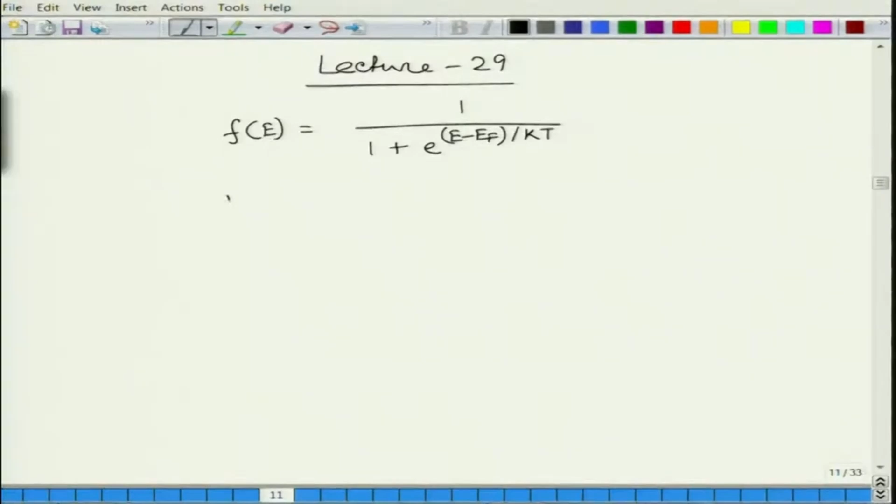We have looked at the Fermi function for a particular energy level, which has this form. It is a function of temperature, and the Fermi level is defined as that energy for which the Fermi function is half, or the probability of finding an electron in that energy level is 50%.

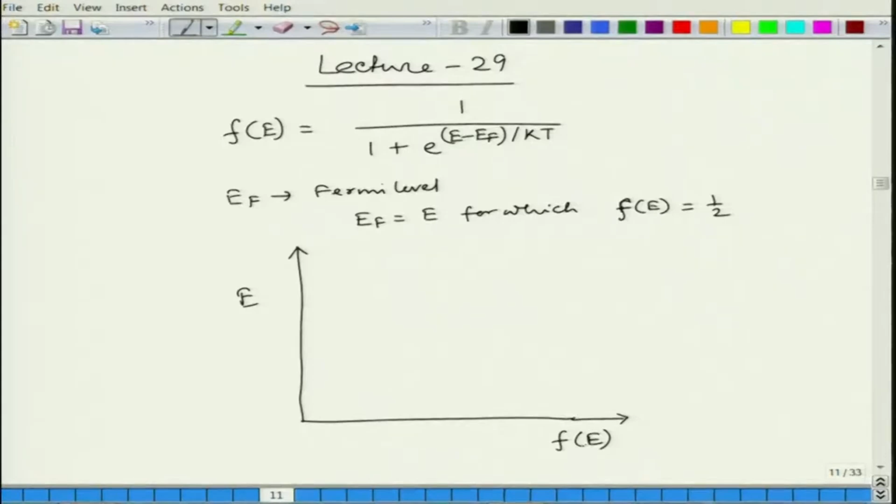Now let us look at the effect of this in terms of the band structure. Suppose we have this energy axis, and if we plot the Fermi function, how will it change? The Fermi function is a probability, so it can vary between 0 and 1, these being the two hard limits.

Now at a particular energy, let us say this is the band structure for a particular material, the Fermi level will be here, at 50% occupancy probability, just in between the conduction band and valence band. If we draw the corresponding line, at 0 Kelvin the probability will change between 0 and 1 abruptly. In between you will have equal probability, and when the Fermi function is half, this is the Fermi level. This particular curve is for 0 Kelvin, when there is no excitation available.

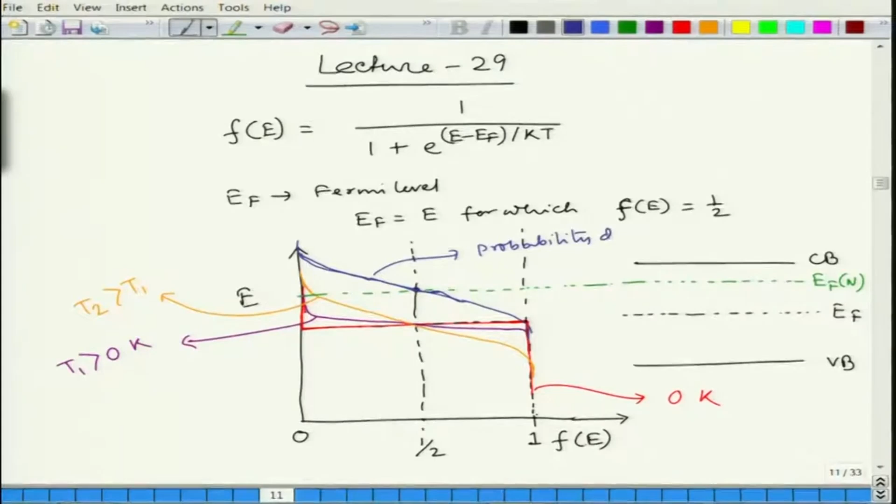Now, for an n-type semiconductor, the Fermi level itself is shifted towards the conduction band. EFn is the modified Fermi level for the n-type semiconductor. If we extend that line, for this n-type material the crossover will happen at this point, because that is the Fermi level and it has to be F equal to half. At that particular temperature, the Fermi level of that material will be parallelly shifted and move upward. This is the probability distribution, the Fermi function, at temperature T2 for the n-type semiconductor.

So we see that the Fermi level is shifted upwards in the energy scale. On the other hand, for a p-type semiconductor, the Fermi level will shift downwards towards the valence band, because now the hole concentration will be higher. The same thing will be parallelly shifted, but I should use another color to be consistent. So this one is the Fermi function for the n-type semiconductor, and the lower one is the Fermi function for the p-type semiconductor.

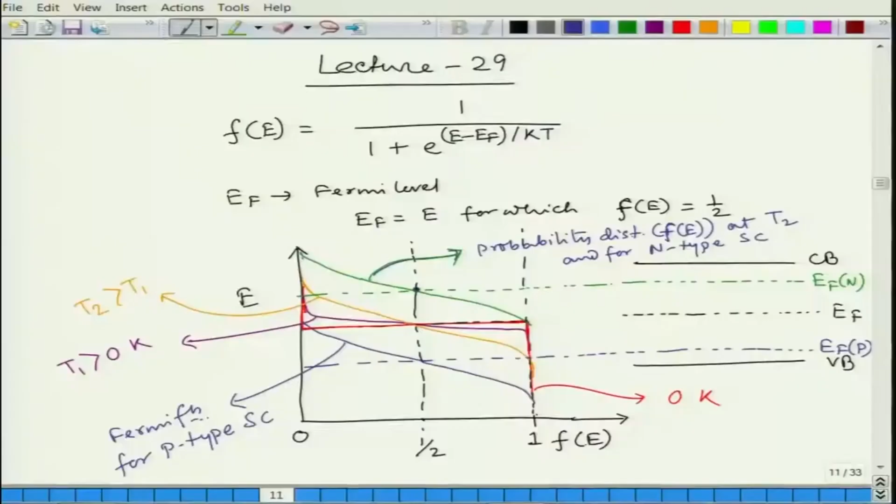So few observations we can write. One is that for intrinsic semiconductor, that means no doping case, in that case EF is always at the middle of the conduction band and valence band, or in the middle of the band gap.

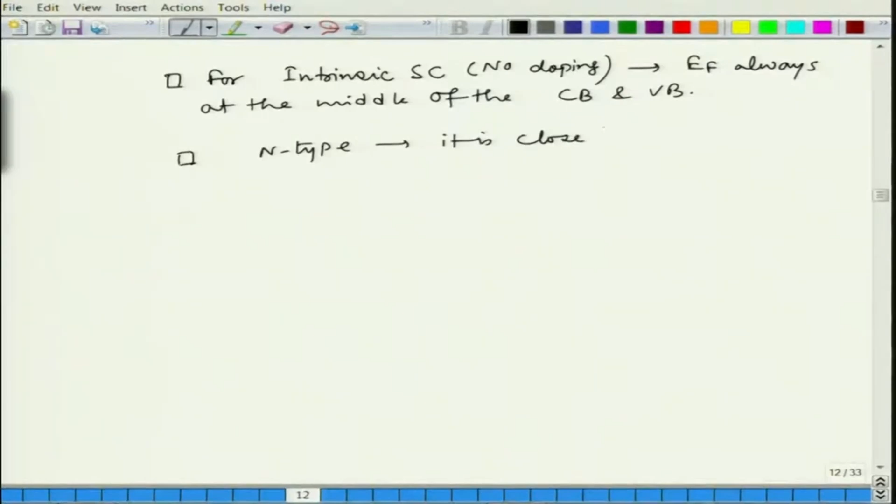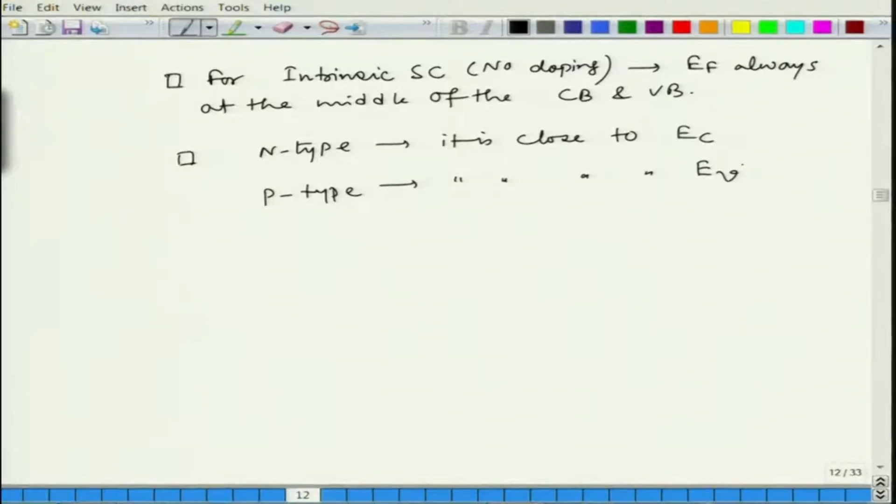Now for n type it is close to conduction band, and for p type it is close to valence band. And we have talked about this 'close to', right, but how close?

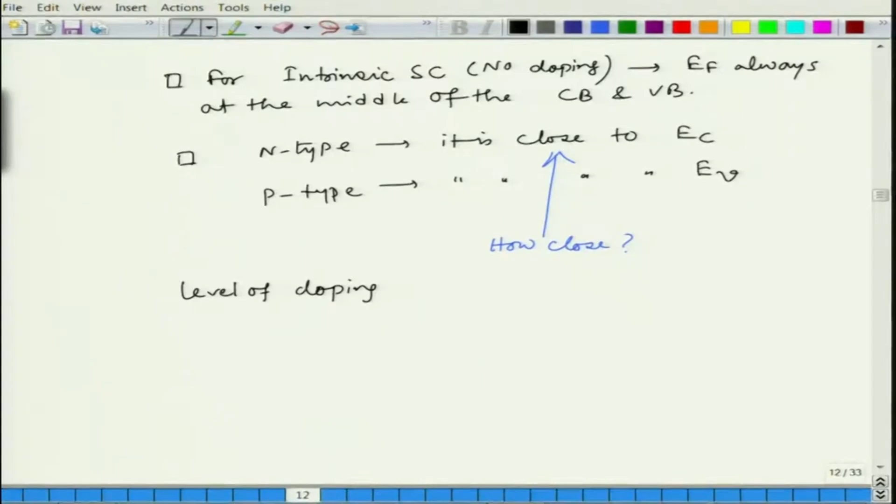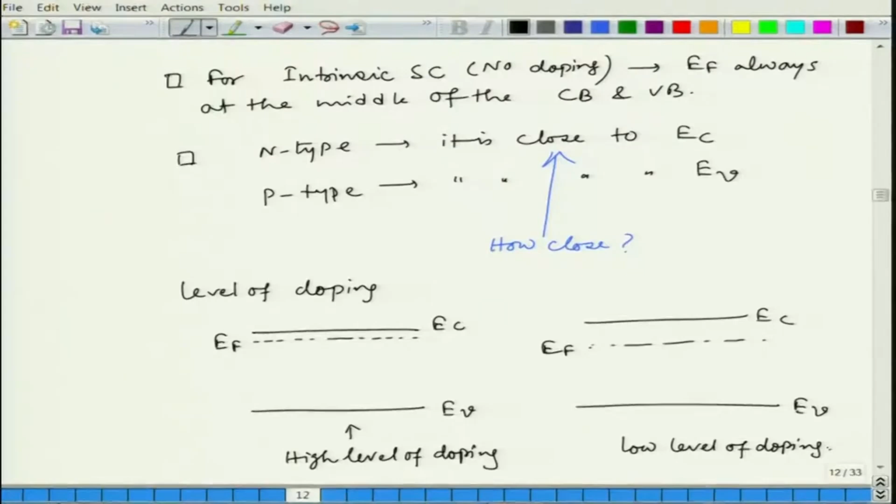That will depend on the level of doping. So you can say that if this is conduction band and this is valence band, and EF the Fermi level is really close to the conduction band, that means it is high level of doping. And for low level of doping you will have it closer to the conduction band, but not that close. That will give you the qualitative understanding of how the Fermi function is affected by doping as well as temperature.

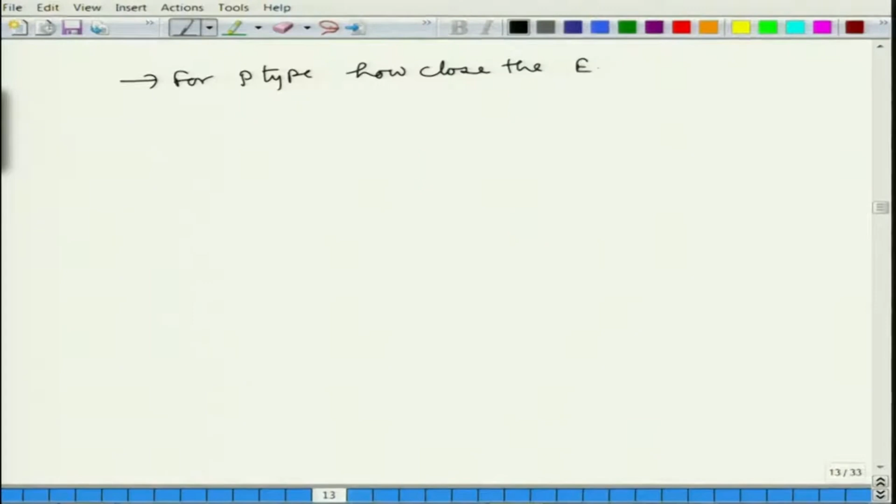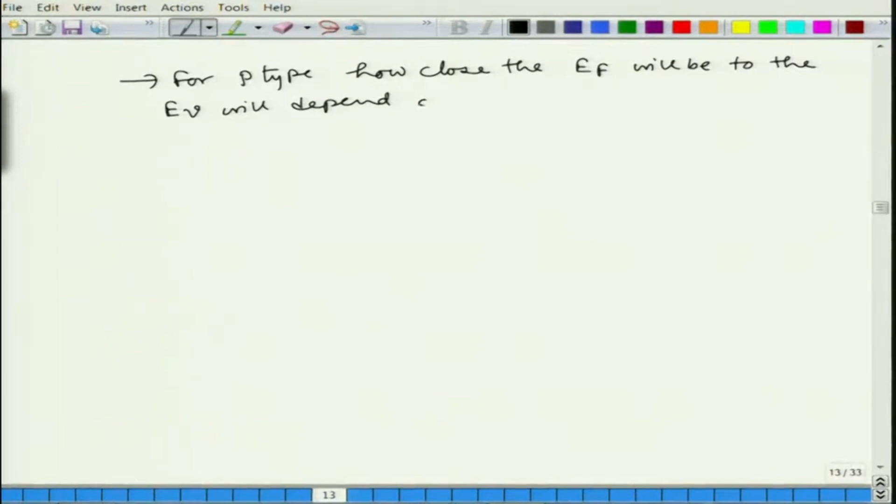So similarly for p type, how close the Fermi level will be to the valence band will depend on doping. Higher the doping, closer the Fermi level. And by doping, I mean introducing impurity element in the bulk lattice of the pure intrinsic semiconductor.

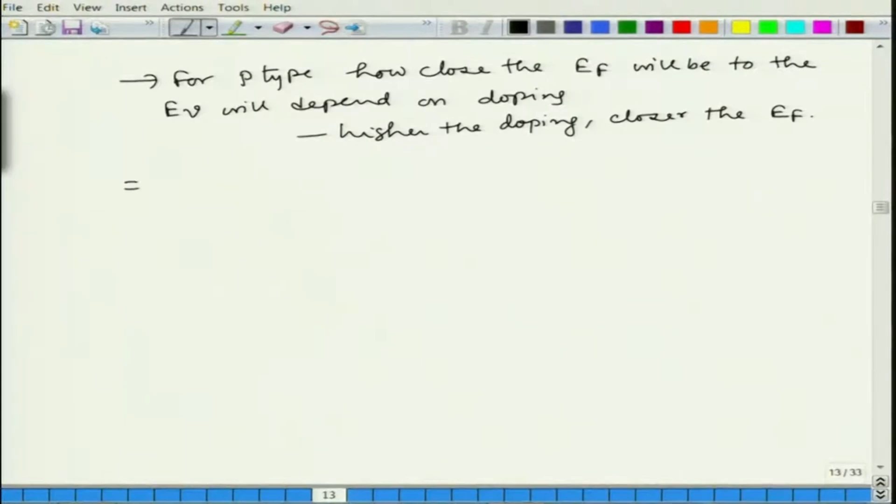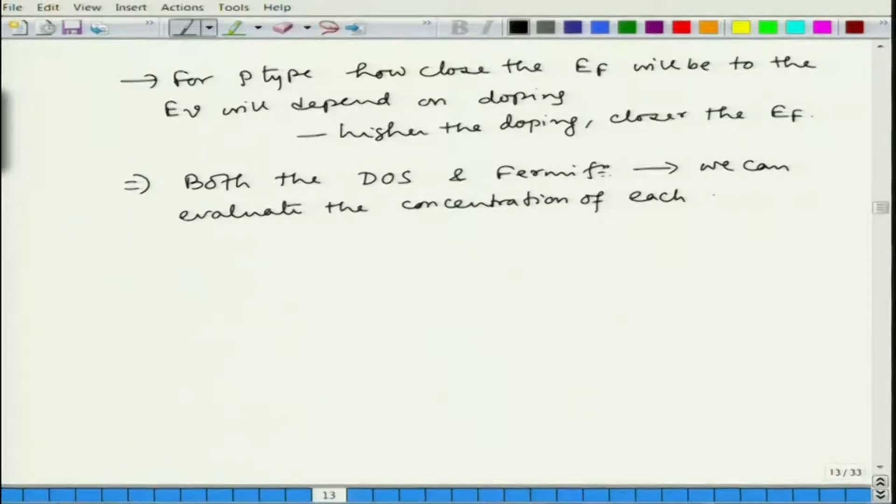Now when we have both the density of state and Fermi function, we can evaluate the concentration of each charge carrier. Electron and hole we can evaluate them, but before we evaluate, let us look at it qualitatively first, and then you can always use quantitative formula to evaluate it exactly. So for electron you can find it by multiplying the probability of finding an electron, which is given by the Fermi function, and the number of available states, and you can integrate it to get the complete number.

Let me first write it and then I will explain. So first thing is that this is concentration of electrons, or rather free electrons, because it is not just electrons, but electrons in the conduction band which are able to carry electricity or charge. And this naught stands for the equilibrium case. N naught means the equilibrium electron density or electron concentration. Equilibrium means no applied voltage or no light or any energy input.

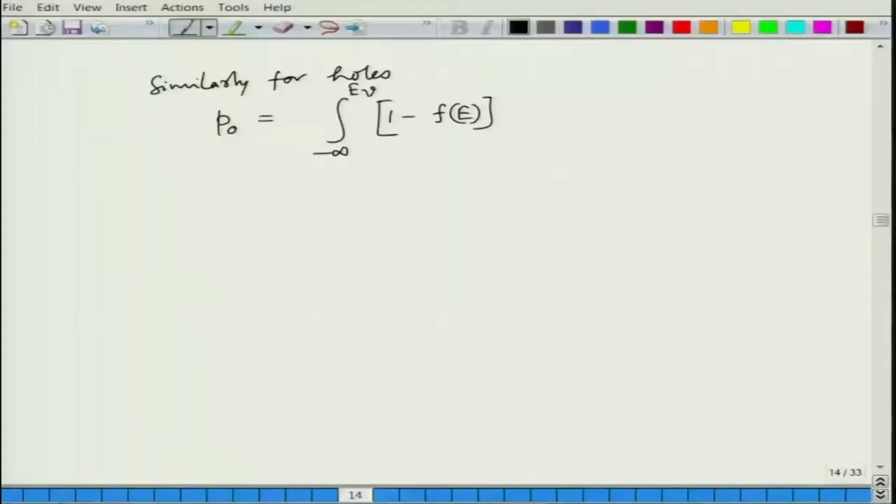Now for the probability of finding a hole, it will be 1 minus the probability of finding an electron. Either it will be a hole or an electron. So probability of finding a hole will be 1 minus the Fermi function. That is the tricky difference you have to note. It is not the Fermi function itself, but 1 minus that, multiplied into the density of state in the valence band.

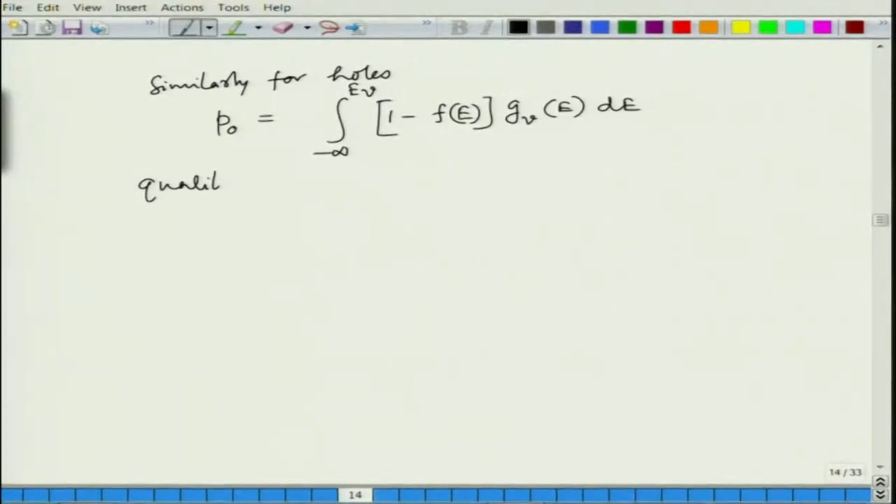By similar logic you will be able to find it. Now, qualitatively, if you look at how these integrations will give you the quantity, qualitatively what you can draw: if you have the conduction band, valence band, and this is intrinsic semiconductor.

So, that means the Fermi level will be, let me continue this. So, this will be the Fermi level, and let me continue this one as well.

Now, here we can plot three things. One is the density of state, which we have seen will be somewhat like this. In the band gap there will be no density of state, zero, and as you go up in the conduction band, density of state will increase, and as you go down in the valence band, the density of state will increase, following a square root law. So this is the density of state.

Now, the other important thing here is the Fermi function. We have seen that for a particular temperature, if this is 1, it will be somewhat like this. So this is the Fermi function.

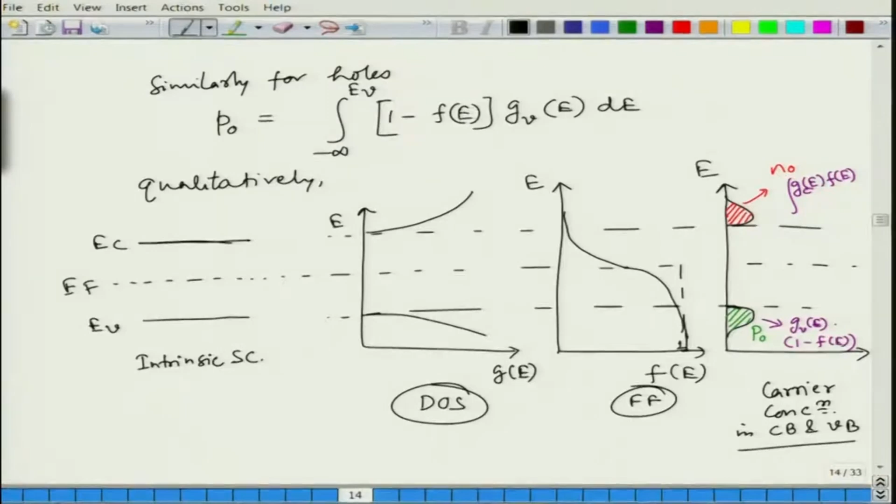And for an intrinsic semiconductor, you can see both of them will be same. So this is the carrier concentration in the conduction band and in the valence band. Now, how these things will change if you dope becomes very interesting.

Now let us look at doped semiconductor. First, we will look at N type. N type means there are more electrons than holes. N type also means that the Fermi level has shifted towards the conduction band.

So let us do the same exercise here. If we have EC, EV, and now we have the Fermi level which is closer to the conduction band edge. Let me extend these lines, then do the same exercise here.

Here we will have the density of state, and it will be the same. Density of state is unaffected by the shifting of the Fermi level. Only the Fermi function is getting affected, not the density of state. So density of state just stays the same as we have seen for the intrinsic semiconductor.

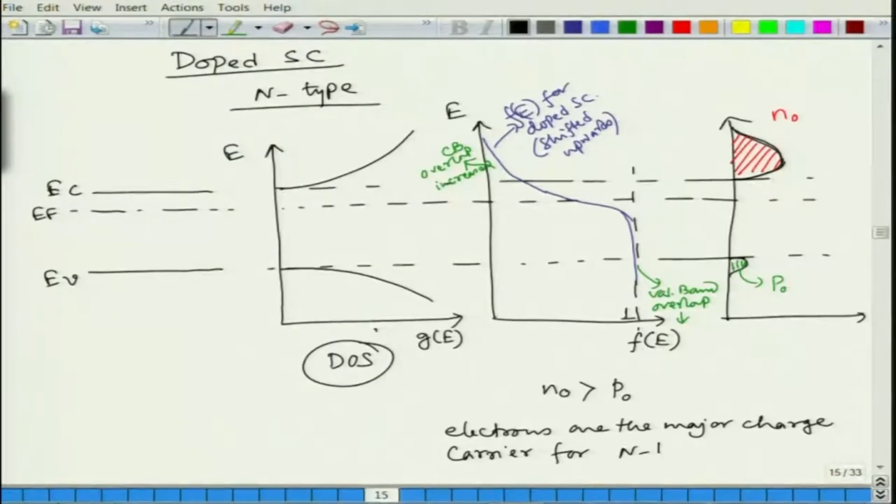So what we see here is that N naught is significantly higher than P naught, which means electrons are the major charge carrier for N type semiconductors. Now what happens for the P type?

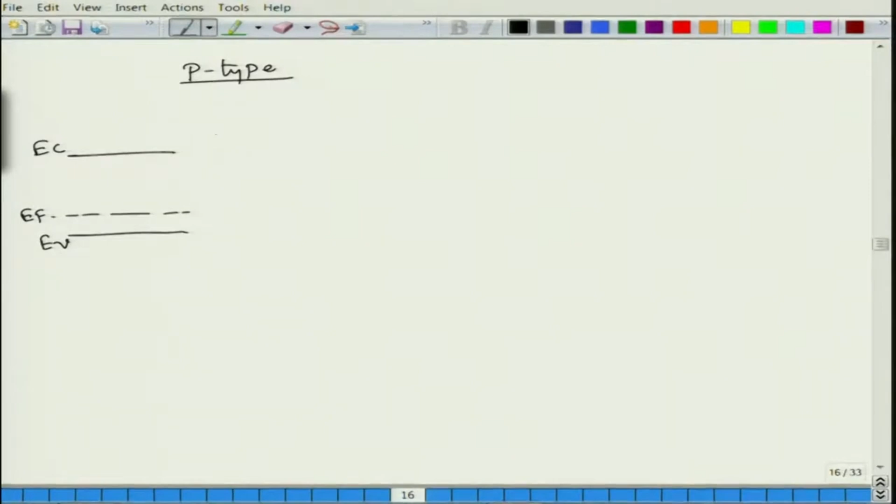Just the opposite, of course. For P type semiconductor, we again have conduction band and valence band, but now the Fermi level is shifted towards the valence band, close to it. Let me do the same exercise again.

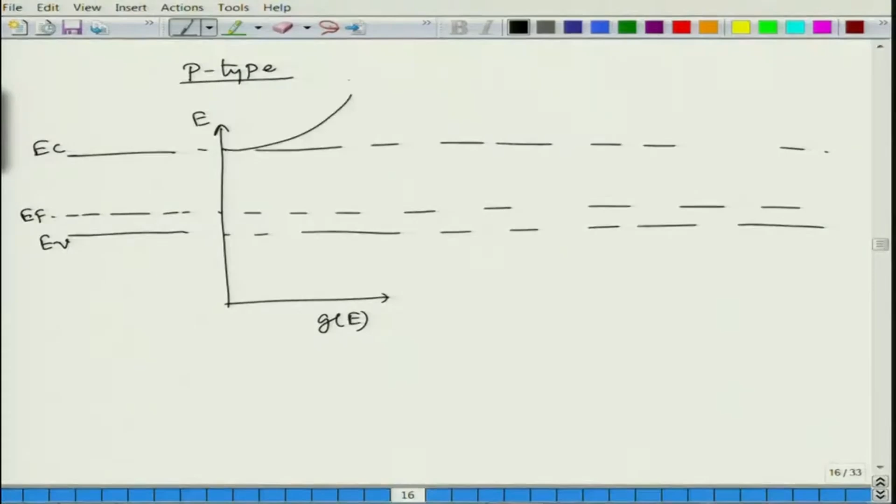First, the density of state stays unaffected. Then the Fermi function.

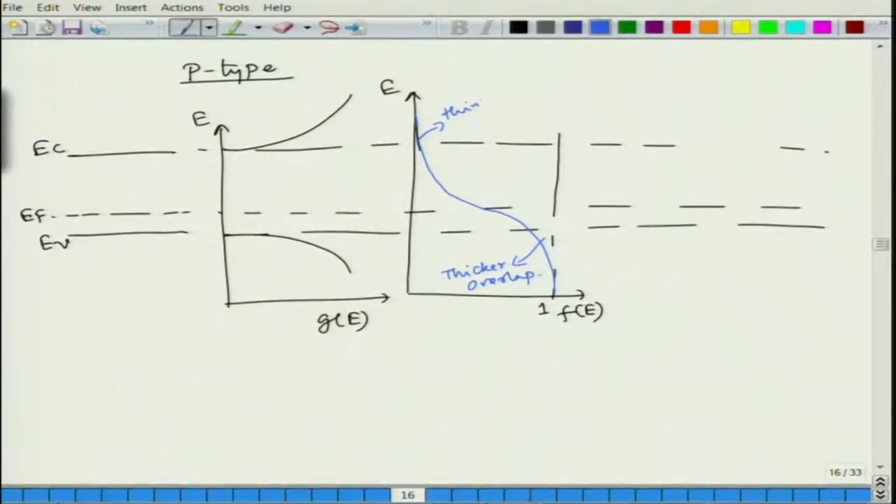Now the overlap will be very thin here in the conduction band, while the valence band overlap will be much thicker. So, thicker overlap in the valence band and thinner overlap in the conduction band.

Now if you find out the carrier concentration, it will be just the opposite. You will have a small bulb here at the cost of a larger, thicker bulb here, so P naught will be much more than N naught.

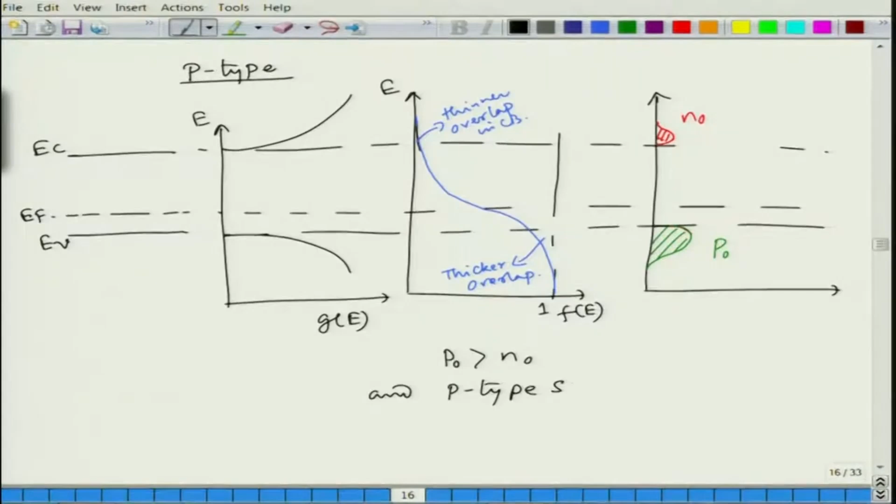This is happening only because the Fermi function is getting shifted downwards for the P type semiconductor, while the density of state G stays exactly the same. So here P naught is higher than N naught, and that is how the P type semiconductor has holes as the dominant, or major, charge carrier.

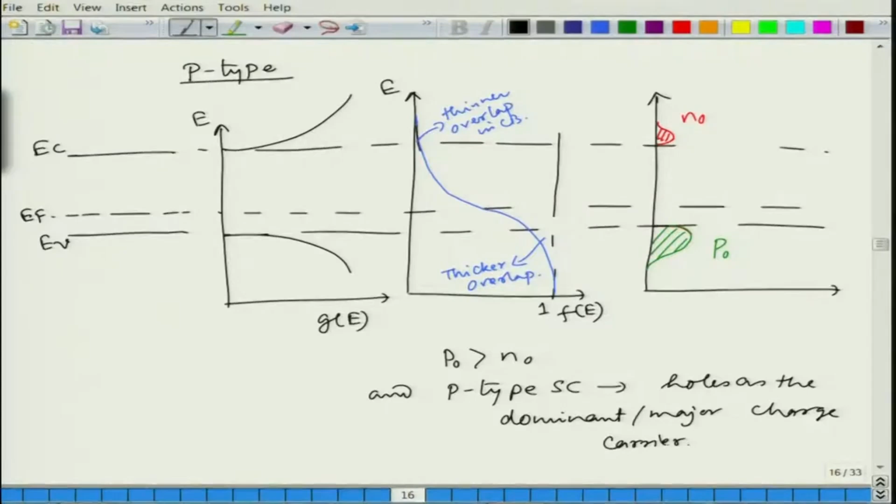So that is how the Fermi energy and density of state play roles in this carrier concentration. Now, this is well and good in terms of qualitative concept, how it gets affected we know, but now we need some quantitative estimate of this N naught, P naught, and everything.

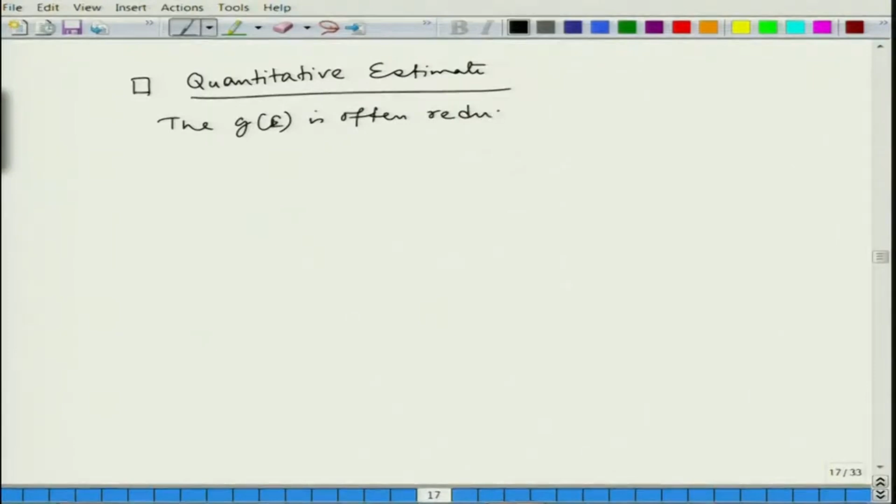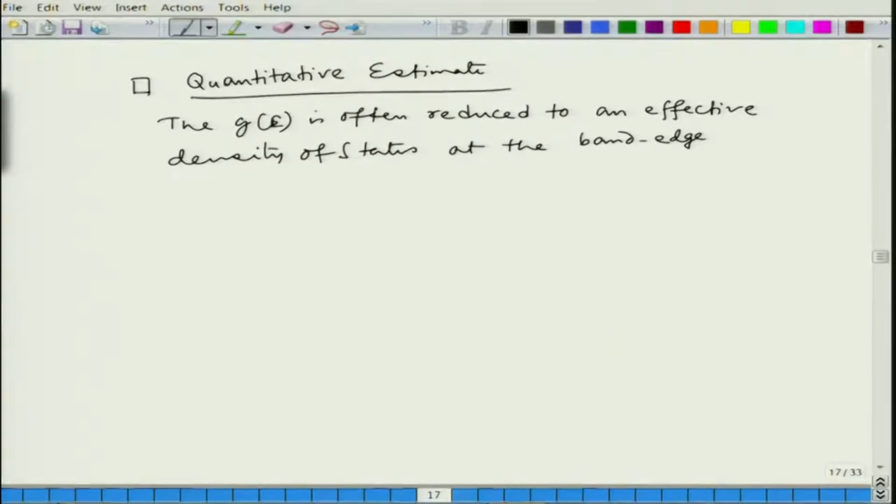For quantitative estimate we need more useful terms such as the band edge density of state. So the density of state is often reduced to an effective density of states at the band edge. The edge is the most important thing, since most of the action happens at the edge, which is the interesting part of the whole semiconductor structure.

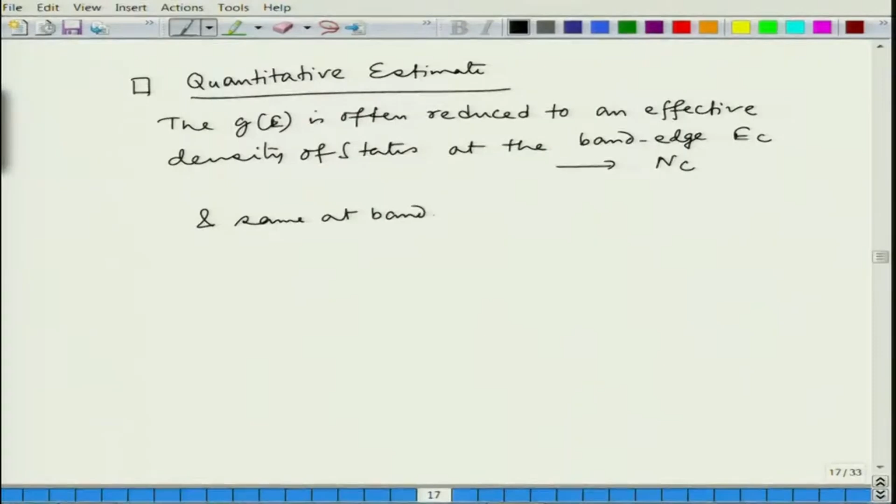For the electrons, the conduction band edge EC is important. So the density of state G can often be reduced to an effective density of state at the band edge EC, and we name it NC. Similarly, at band edge EV, relevant for the holes, we name it NV.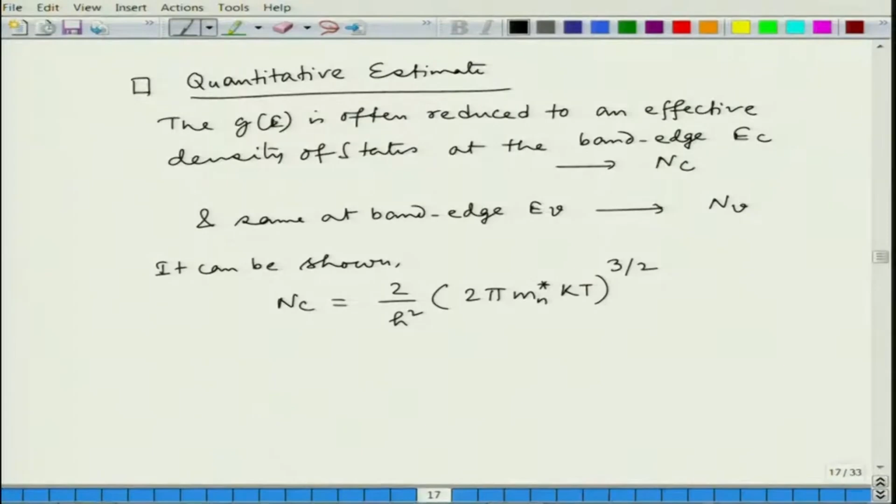It can be shown, though this derivation is beyond the scope of this syllabus, that NC can be written in terms of 2 over h square, not h bar square, but h square, into 2 pi mn star multiplied by kT, the whole to the power 3 by 2. Here h is Planck's constant, mn star is the effective mass of the electron, T is temperature, and k is the Boltzmann constant.

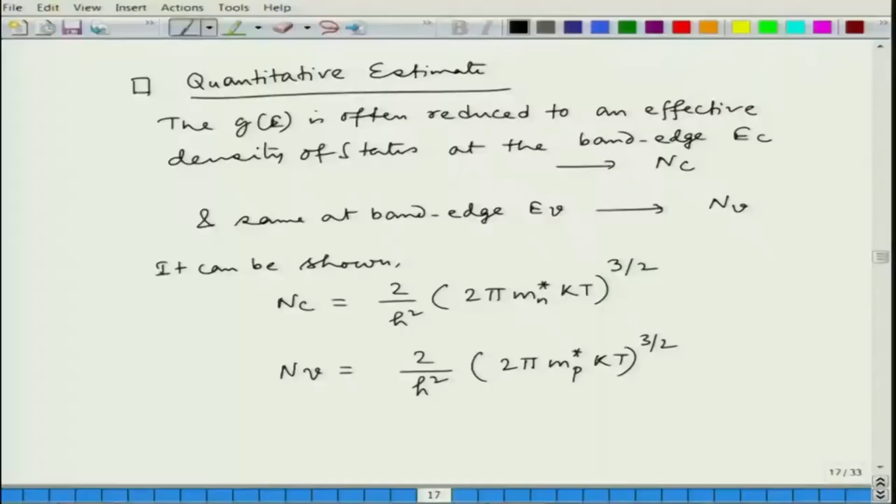Similarly, we can write NV, with the same expression, only using the effective mass of the hole. This gives us the effective value at the band edge. So instead of doing the integration, we can just multiply that effective value with the effective density of state at the band edge.

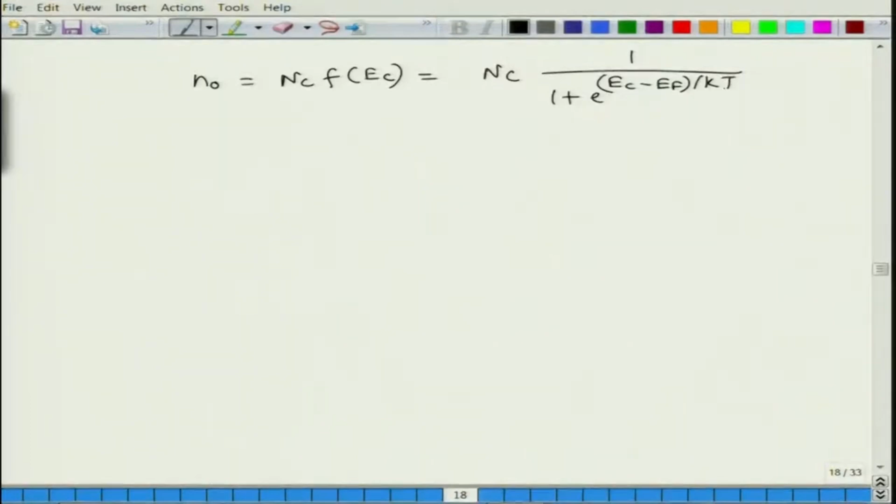So now, if we find the equilibrium concentration of electrons, that will be NC, the effective density of state, multiplied by the Fermi function, again at the edge. So we can write NC times the Fermi function at EC minus EF divided by kT. You've just used the definition of the Fermi function, and this simplifies to exp of minus (EC minus EF) divided by kT.

This is an approximation, valid when EC minus EF is greater than, rather much greater than, kT, which is often true for moderate temperature.

If you go for really high temperature, then the approximation of 1 over 1 plus e to the power something equals e to the power minus that something is not valid if that something is close to 1. So if it's a big number, when Ec minus EF is much greater than kT, then you have a valid approximation. So basically from this we get N naught is Nc into e to the power minus (Ec minus EF) divided by kT.

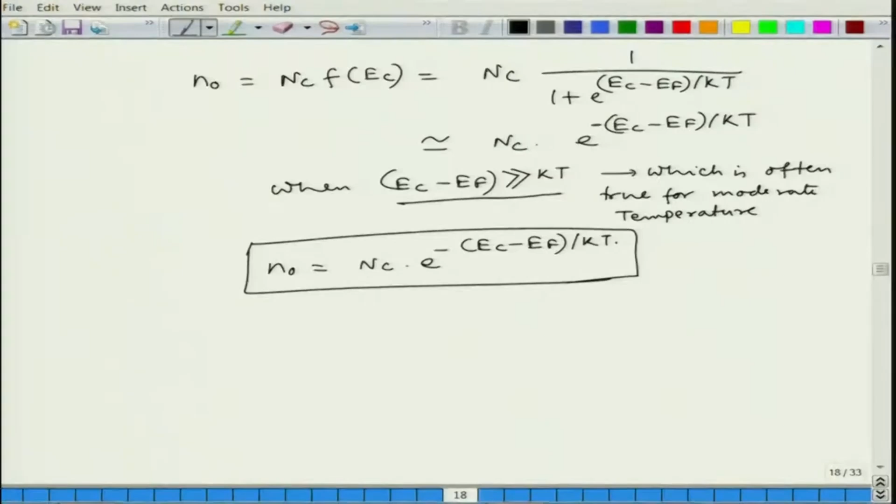we have the hole concentration, which will be Nv multiplied by e to the power minus (Ef minus Ev) divided by kT. Now it is the other way round, because the energy is decreasing as you go deeper into the valence band. So please pay attention to that.

So what it shows, both the expressions of N naught and P naught show that the closer the Fermi level is to Ec or Ev, the higher the carrier concentration, because this is a negative exponential function. So if the exponent goes bigger, the value becomes lower. So the closer EF is to the conduction band, N naught is maximum, and the closer EF is to the valence band, P naught is maximum. That is how it goes. And this is the same observation we have seen when we looked at it qualitatively.

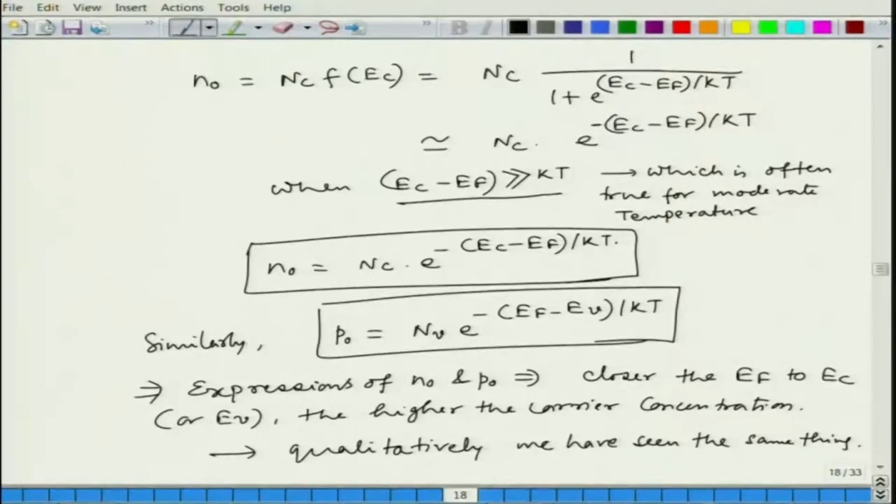So qualitatively we have seen the same thing. So both the conceptual, schematic concept should be clear in your head, as well as you should know what is the quantitative estimate of that. Both quality and quantity are important.

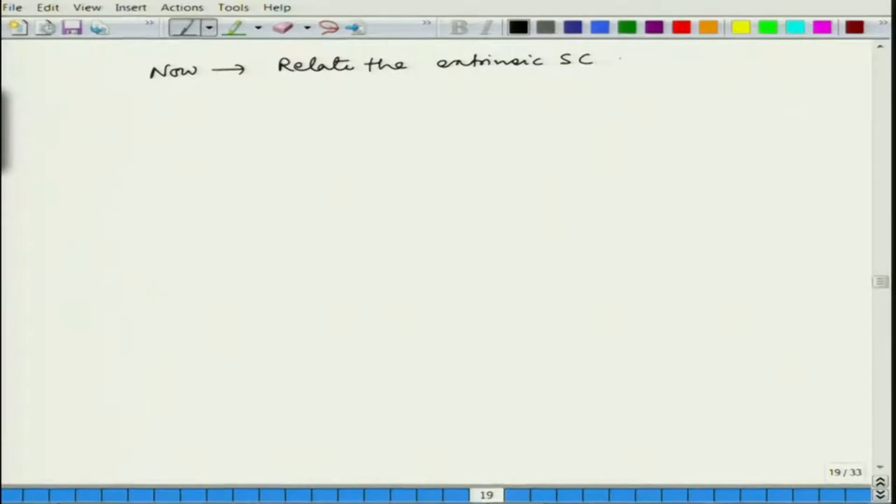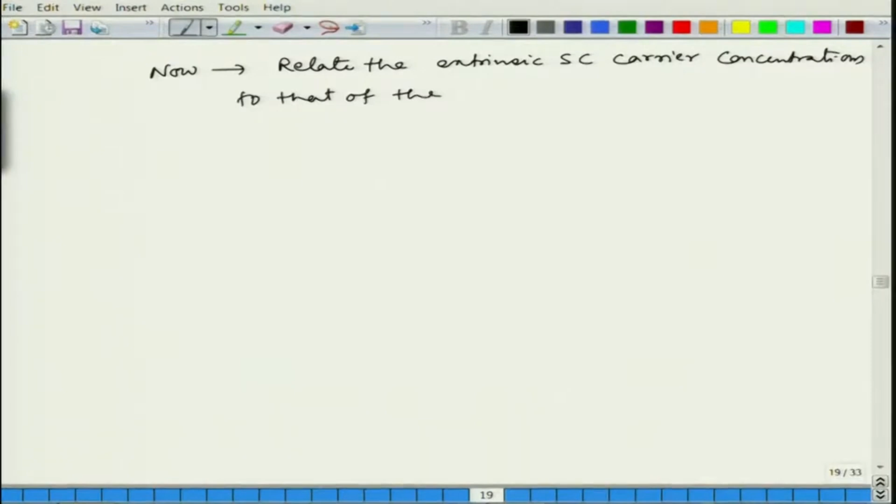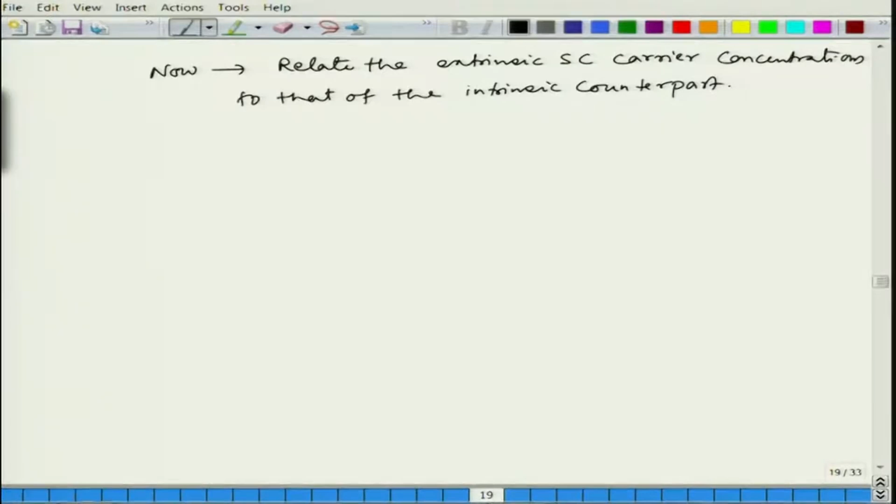Now we need to relate the extrinsic semiconductor carrier concentrations to that of the intrinsic counterpart. That will tell us how far we moved by doping, by making it an extrinsic semiconductor, how much carrier concentration we could tweak. So that is important to quantify.

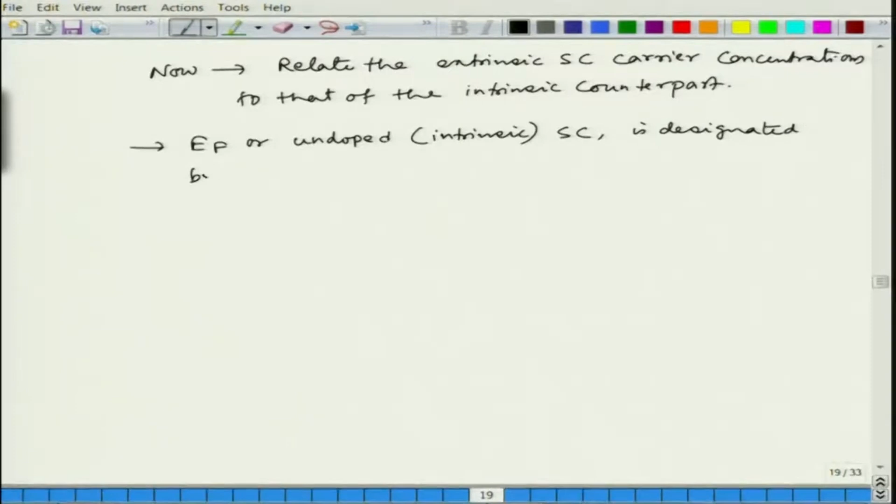So EF for undoped, or intrinsic semiconductor, let's designate it by Ei. I stands for intrinsic, and the corresponding carrier concentrations are Ni and Pi.

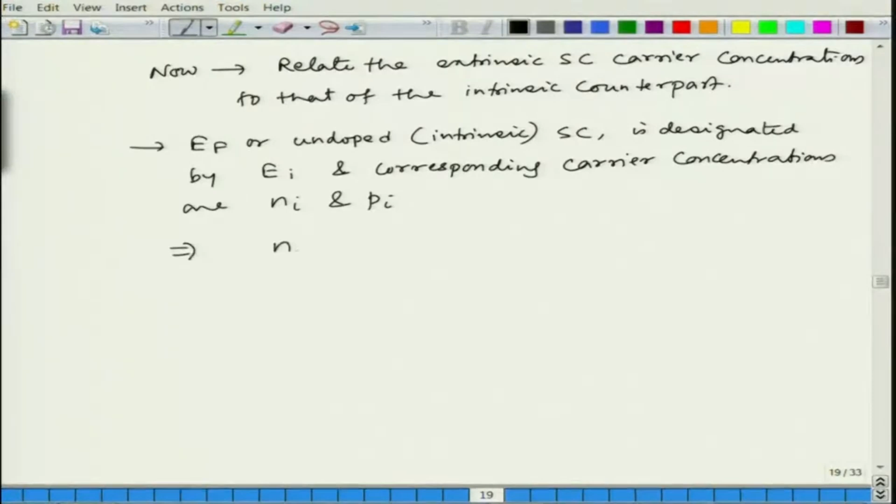If that is the case, then we can write that Ni is nothing but Nc e to the power minus (Ec minus Ei) divided by kT. So we have done nothing - in case of Ef we have written Ei, and in case of N naught we have written Ni. So basically from the extrinsic part, we have used the same expression, just for intrinsic we have named Ef to be Ei.

So this is true, as N naught tends to Ni as Ef tends to Ei. So this expression we can write for intrinsic semiconductor, and for Pi what we can write is Nv e to the power minus (Ei minus Ev) by kT. The same thing again we have done - Ef we have replaced by Ei, and P naught we have replaced by Pi.

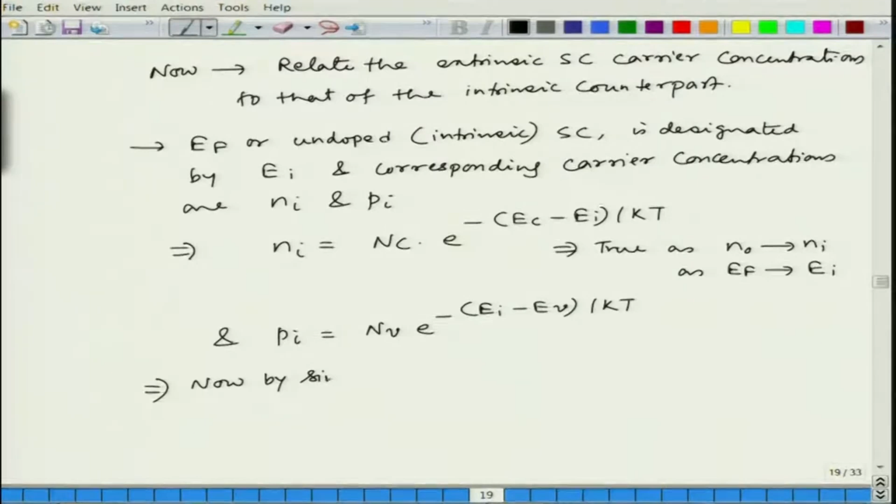Now by simple algebra you can show that N naught can be written as Ni e to the power (Ef minus Ei) by kT. So what we have done is, from the N naught and Ni expressions, we have eliminated Ec. So we are left with Ef and Ei. Ef is the doped semiconductor Fermi level, and Ei is the undoped semiconductor Fermi level.

And similarly, P naught will be Pi e to the power (Ei minus Ef) divided by kT. So here what we have done, we have eliminated Ev. So that is giving us how the carrier concentration changes as you dope, compared to its intrinsic value.

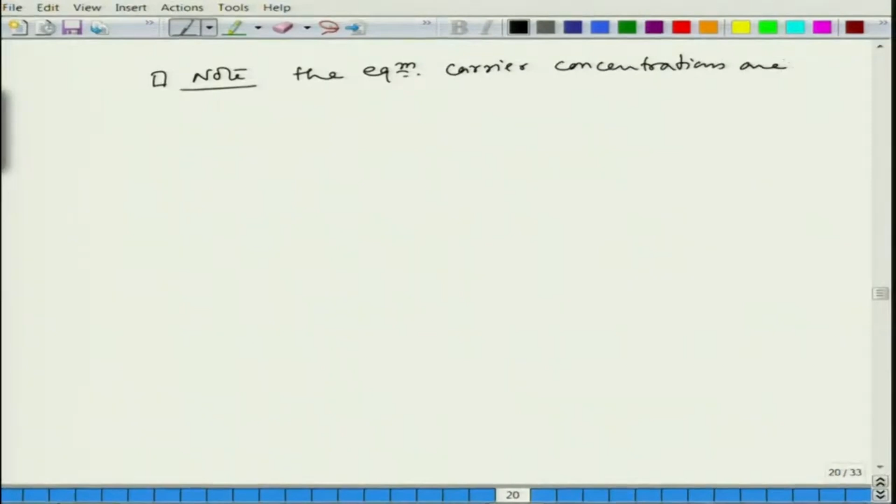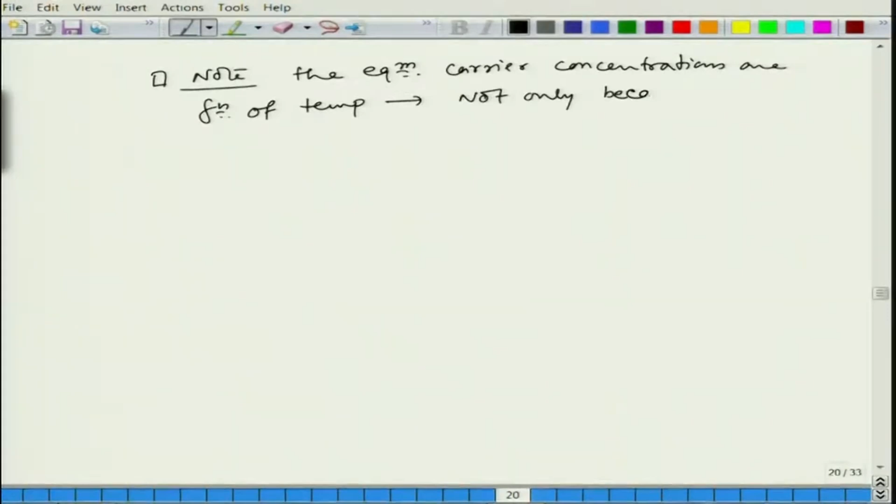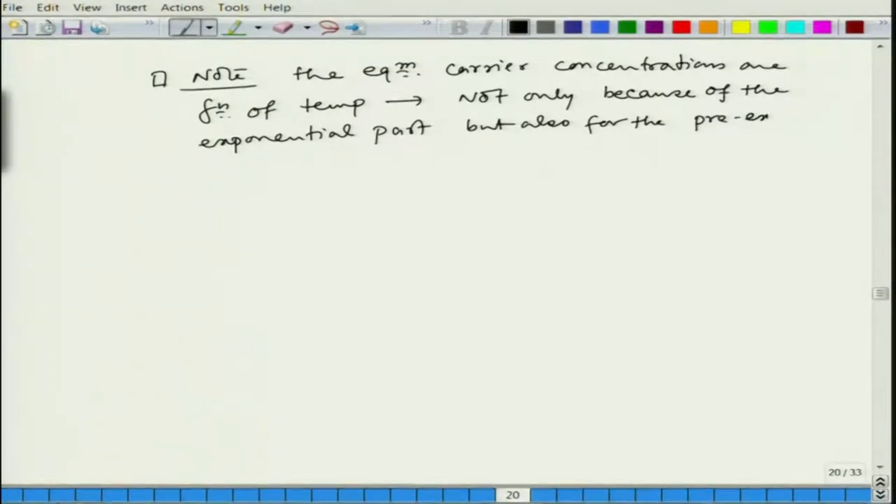So note that the equilibrium carrier concentrations are a function of temperature - everywhere we have this kT thing, so that means it is a function of temperature. So it is not only because of this kT, because of the exponential part, but also the pre-exponential prefactor. That means Nc, Nv, the small ni, Pi - everything is a function of temperature.

That means it is a strong function of temperature, because both the exponential parts are anyway changing largely by a small change in temperature. They are more sensitive functions, and the pre-exponential term also has this temperature dependence.

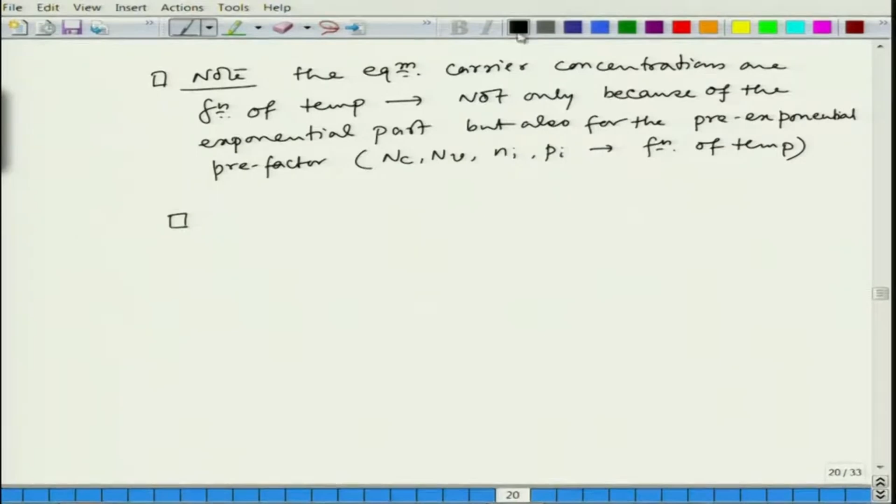Now another very important observation, which I should stress with red stars: if you multiply these two carrier concentrations, the electron concentration and the hole concentration, you will see it is the same as the multiplication you get for the intrinsic value. If we go back to the expression, multiplying n naught and p naught, the exponential parts are reciprocal to each other, so they get cancelled out. What you are left with is n naught p naught equals ni pi.

As the exponential parts cancel each other out, what is ni pi? That is ni squared, because for an intrinsic semiconductor the number of electrons and number of holes are the same, so ni equals pi, meaning ni pi gives you ni squared. That is a very important observation you should make.

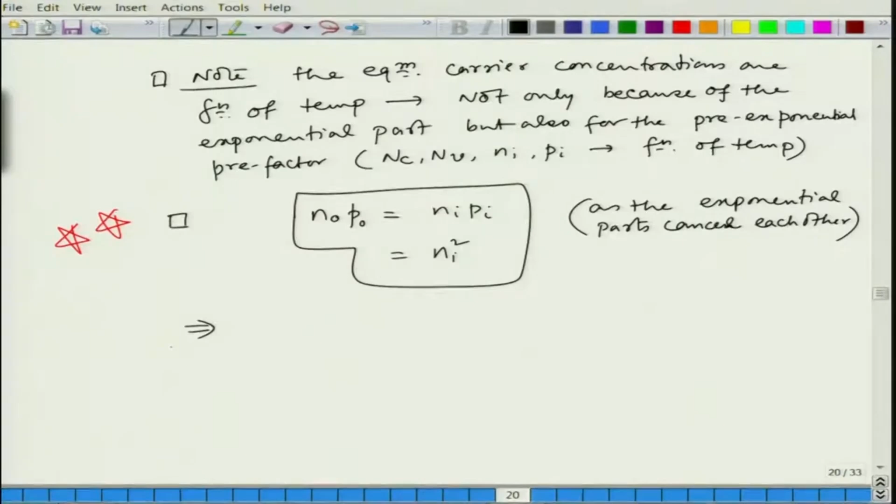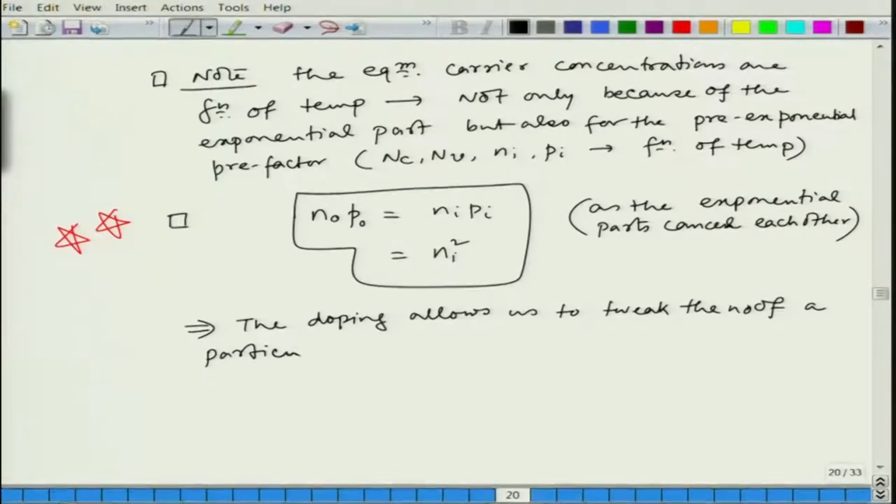Physically, what it means is that doping allows us to tweak the number of a particular carrier at the cost of the other carrier. So it is very important to note this 'at the cost of'. If you want to increase the number of electrons in the conduction band, the cost is the reduced number of holes in the valence band. So their multiplication does not change.

Ni is a material property, so you cannot change ni by doping, even by doping you cannot change it. If you cannot change ni, that means the product of n naught and p naught you cannot change. So if you increase n naught, p naught has to decrease. One carrier is increased or modified at the cost of the other carrier.

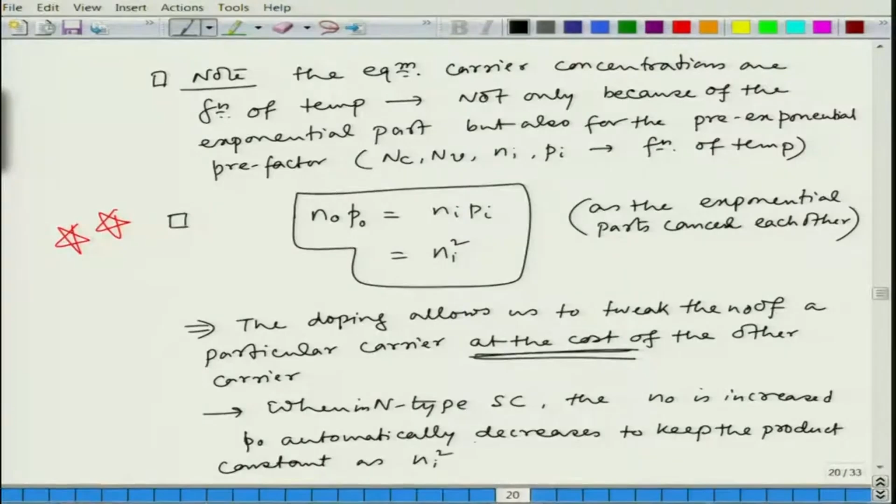So when, in an N type semiconductor, n naught is increased, p naught automatically decreases to keep the product constant, as ni squared is invariant for the substrate semiconductor.

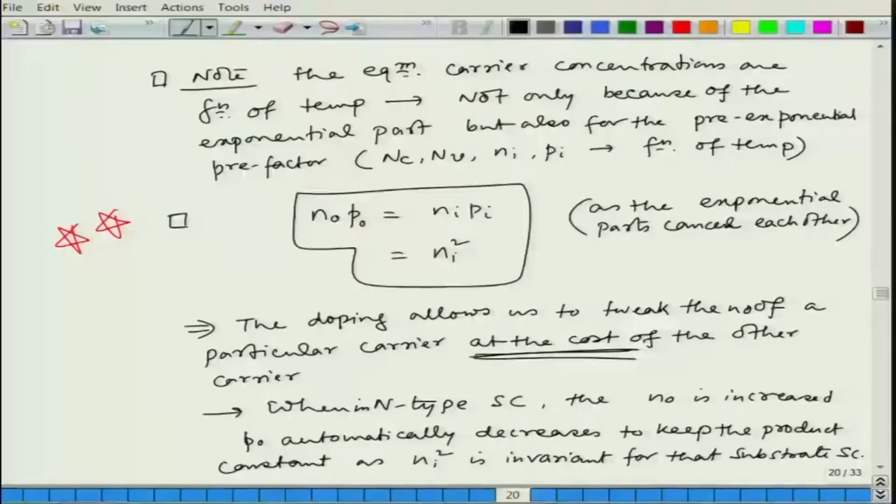Of course, here I should mention that if you do heavy doping, then you cannot call it a substrate semiconductor anymore, because it will form a kind of an alloy. For example, if you put a lot of aluminum in a silicon substrate, it will form a silicon-aluminum alloy or some intermetallic, so you cannot just call it a doped semiconductor anymore. In that case the material itself has changed, so ni will also change, and then n naught p naught can take some other value. But that never really happens, since in reality you dope a much smaller quantity than the substrate.

So now we are going to start looking at the motion of these carriers. Ultimately, when the carriers are in motion, only then do you get the photovoltaic effect. Photovoltaic effect is the result of this carrier motion; if they do not move, you do not have any current. So it is not just the concentration, but the motion that is important.

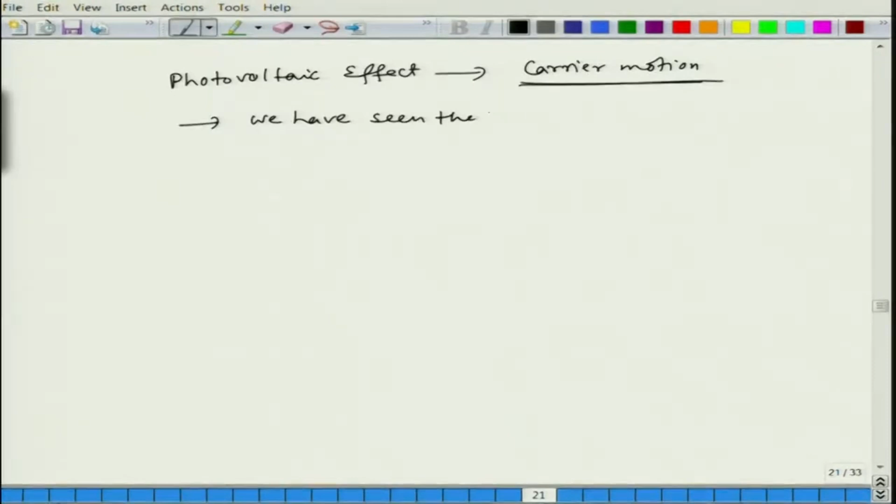I will just start it today, and in the next class we will elaborate on this, but let us begin with what we mean by carrier motion. One thing we have seen is the quantity of carriers, that means N and P, under equilibrium condition, and that is why we call them N naught and P naught. Naught means equilibrium.

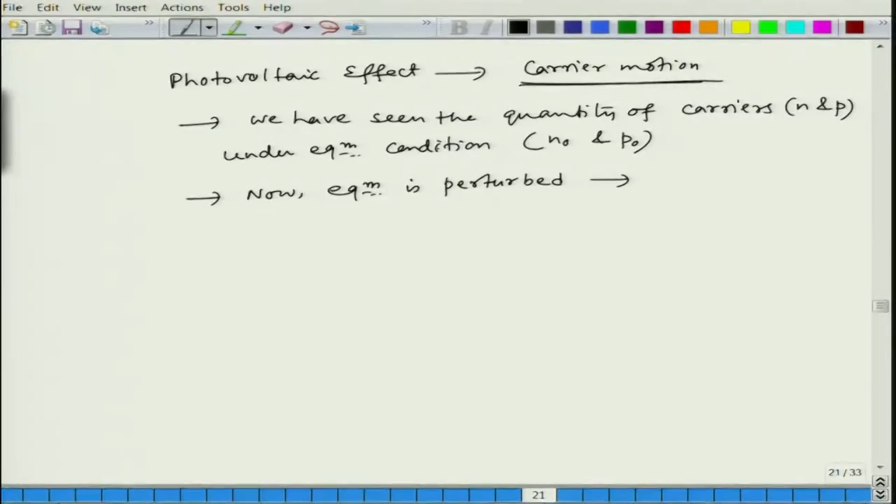Now when this equilibrium is perturbed, then the carriers will be set in motion, then they will move, isn't it? Under equilibrium nothing can move; there is no driving force for any carrier to move. But when you perturb the equilibrium, the carrier motion will change, I mean the carriers will start to move. So some force is needed for them to move.

That force can either be the sunlight, which causes an increase in energy of individual carriers, or it can be some voltage applied from outside, which will also perturb the equilibrium and set the carriers in motion. We will look at these different kinds of carrier motions in the next class. Thank you for your attention.